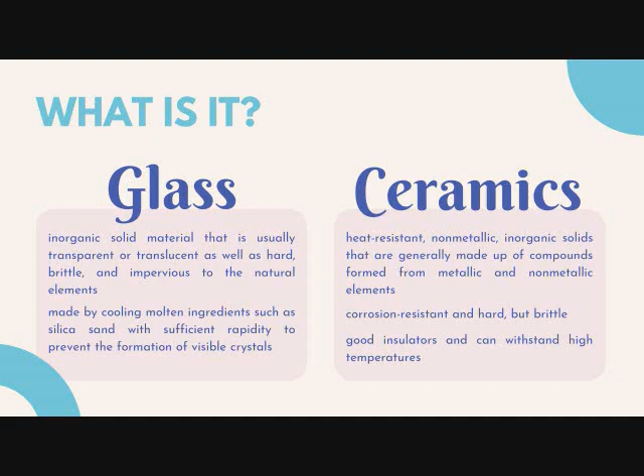As I've mentioned a while ago, glass and ceramics, though in some ways similar, are still a bit different. Glass, for example, contains impurities that prevent crystallization. This is because glass is an inorganic product of fusion that is cooled to a rigid condition without crystallization, as opposed to ceramics, which are inorganic, non-metallic, crystalline solids. Moreover, glasses are amorphous solids, which means that they have no real or apparent crystalline form.

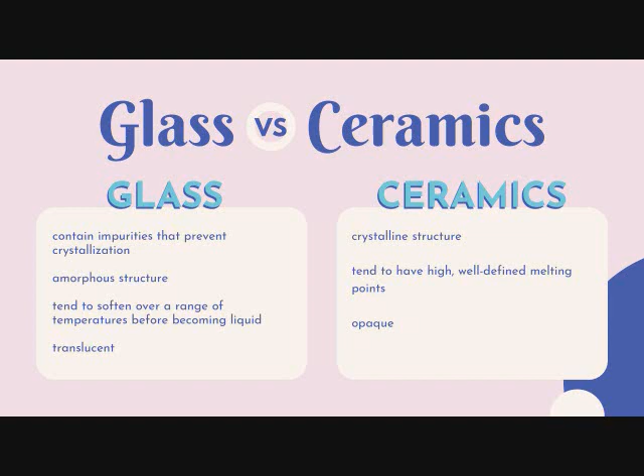Another characteristic of glass is that it tends to soften over a range of temperatures before becoming liquid, while ceramics have high and well-defined melting points. Another difference is that glasses tend to be translucent, while most ceramics are opaque to visible light.

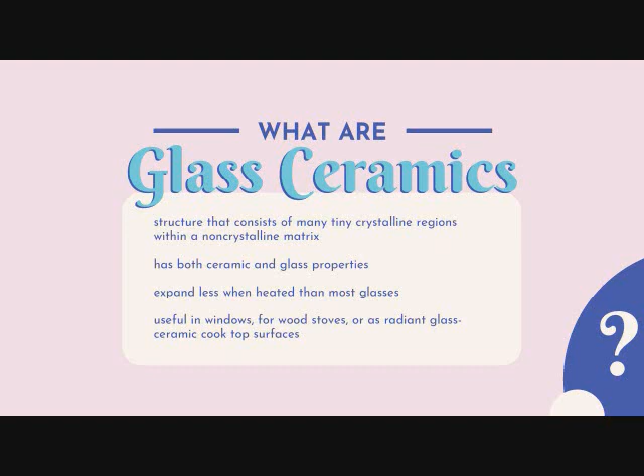With the two having quite similar properties, some changes could create a new product, an example of which is glass ceramics. Glass ceramics is a product formed by the controlled crystallization of a glass-forming melt. It is a structure that consists of many tiny crystalline regions within a non-crystalline matrix. This structure gives some properties of ceramics and some of glasses. Glass ceramics also expand less when heated than most glasses, making them useful in windows for wood stoves, or even as radiant glass ceramic cooktop surfaces.

Now that we were able to define glass and ceramics, and we were also able to identify the existence of a product that is basically a combination of the properties of the two, we can now focus on ceramics. There are two main categories of ceramics: traditional and advanced. Traditional ceramics include objects made of clay and cements that have been hardened by heating at high temperatures. Traditional ceramics are used in dishes, flower pots, wall tiles, etc.

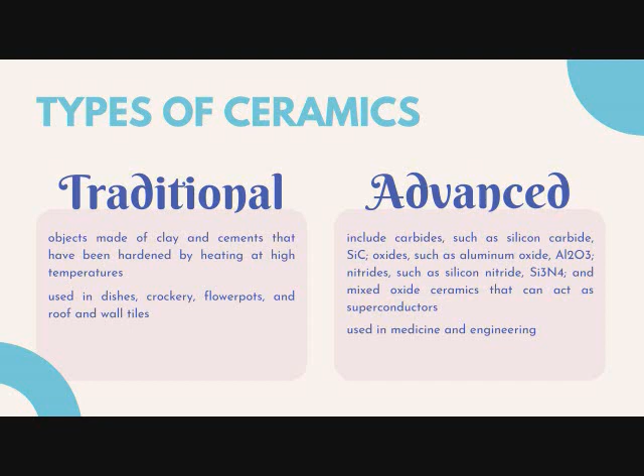The other category is advanced ceramics. Advanced ceramics include carbides such as silicon carbide, oxides such as aluminum oxide, nitrides such as silicon nitride, and many other materials, including the mixed oxide ceramics that can act as superconductors. Advanced ceramics require modern processing techniques, and the development of these techniques has led to different advances in medicine and engineering. So let's talk about the different types of glass and ceramics.

So for glass, we have fused silica glass. Fused silica glass is when silicon tetrachloride undergoes pyrolysis, which is also known as decomposition due to high temperature. Other characteristics are that it has low expansion and a high softening point, it has high thermal resistance, and it is transparent to ultraviolet radiation. Because of these characteristics, it has several applications such as optics and lenses for the ultraviolet spectrum, starting material for optical fiber, windows for spacecraft, halogen lamps, and semiconductors.

Next, we have soda lime glass. This is the most common type of glass, since 95% of all glass manufactured is soda lime. The typical composition is 70 to 74% silicon dioxide, 8 to 13% lime, and 13 to 18% sodium oxide. It melts at relatively low temperatures, and it is also chemically resistant. It is easily resoftened. As for its applications, it is used in bulbs, window panes, bottles, Tupperware, and containers.

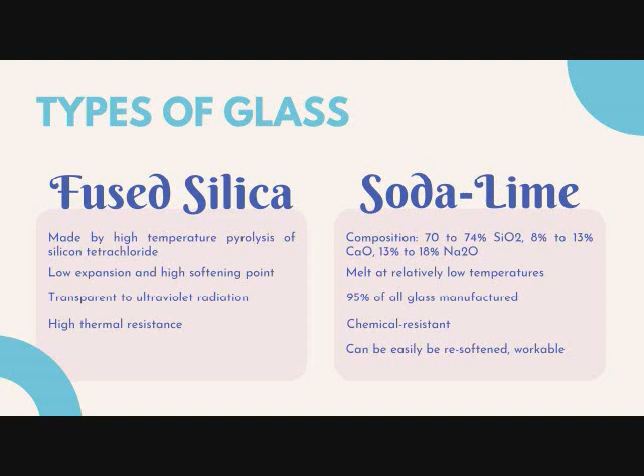Next we have lead glass. For lead glass, lead oxide is used instead of calcium oxide. It has a high index of refraction and dispersion, and it is also electrically resistant. It's often used in electric light bulbs and protection against nuclear radiation.

Next we have borosilicate glass. Typically it contains 10 to 20% boron trioxide, 80 to 87% silica, and less than 10% sodium oxide. It is known for its low expansion coefficient, resistance to shock, and chemical stability. It is also known as Pyrex, and it's mostly used in laboratories. It is also used in high tension insulators, pipelines, and telescope lenses.

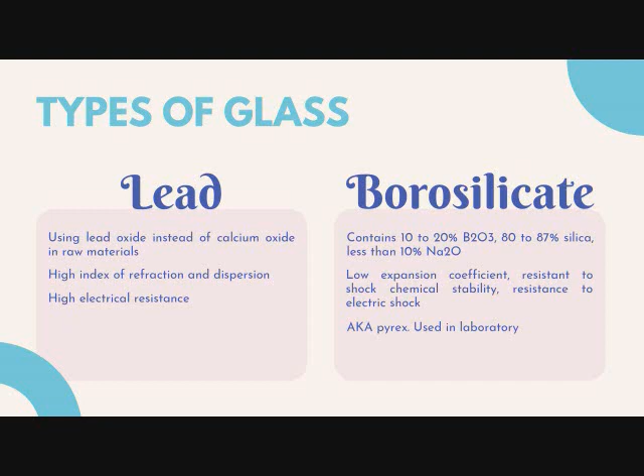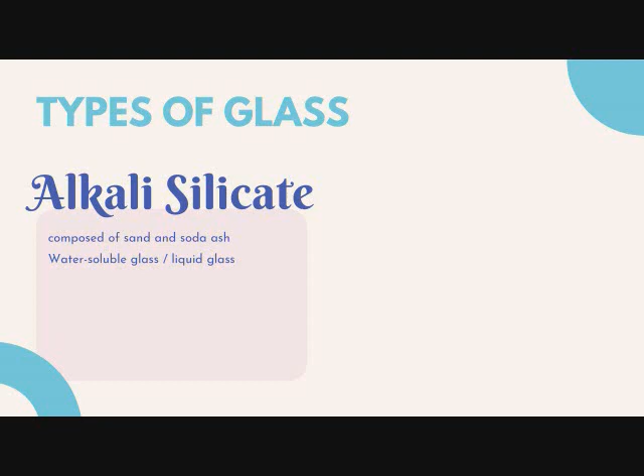Lastly, we have alkali silicates. It has two components only, sand and soda ash. It is also known as water-soluble glass or liquid glass. As for its applications, it is used in adhesives for papers, detergent and soap building, fireproofing, textiles, and silica gel production.

Okay, so now let's discuss the history of glass and ceramics. So first, around 28,000 BCE, or before the Common Era, ceramic figurines are used for ceremonial purposes. 7,000 BCE, sharp tools made from natural glass appear. 5,000 BCE, Phoenician merchants possibly make the first glass.

In 3000 BCE, glazed pottery is produced in Mesopotamia. In 1500 BCE, Egyptians start building factories for production of glassware. In the 1400s, high-temperature furnaces are developed in Europe for metallurgical use. In 1843, Henry Bessemer introduced an early form of float glass. In 1959, float glass was invented in the United Kingdom by Sir Alastair Pilkington, and in the 1980s, ceramic high-temperature superconductors are developed.

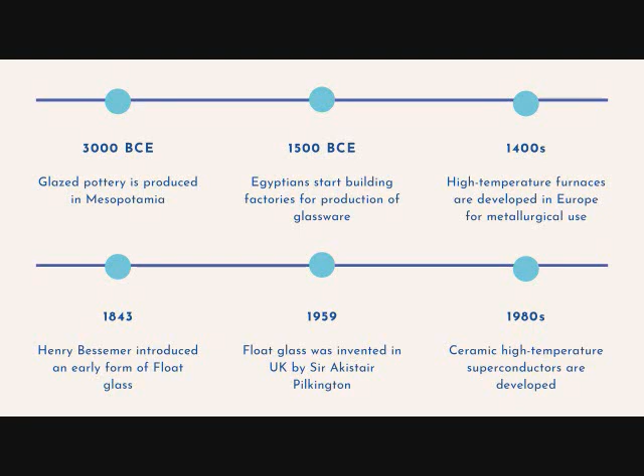The increasing use of LCDs in consumer durables, smart handheld devices, and automotive applications is one of the most significant factors projected to drive the growth of the glass substrate market. In addition, the growth of the semiconductor and electronics industries is further projected to drive the increased demand for glass substrates.

Based on type, the glass substrate market has been segmented into borosilicate-based glass substrates, silicon-based glass substrates, ceramic-based glass substrates, fused silica or quartz-based glass substrates, and others. Borosilicate-based glass substrates type is the most widely used type of glass substrates owing to their superior properties such as low coefficient of thermal expansion, high chemical resistivity, and high surface strength.

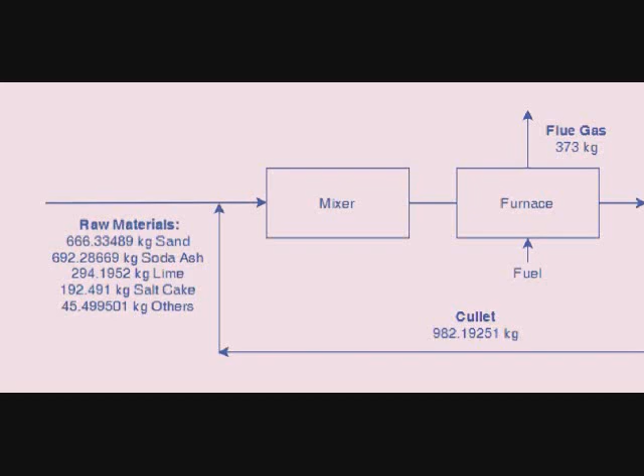Now let's take a look at our block flow diagram for a typical glass making process. So first, the raw materials enter the mixer and are joined together. After this, they are directly transferred into the furnace. During this part, as much as possible, we want to lessen the contaminants, such as dust particles and air holes. So once it is in the furnace, fuel is used and it is heated at around 1600 degrees Celsius. After that, it is transferred onto a tin bath.

So a tin bath is when the molten glass is allowed to flow on top of molten tin. These two substances do not mix, and since molten glass is less dense than tin, it floats. And this allows it to be perfectly flat. So H2 and N2 is entered in the tin bath to prevent the tin from oxidizing.

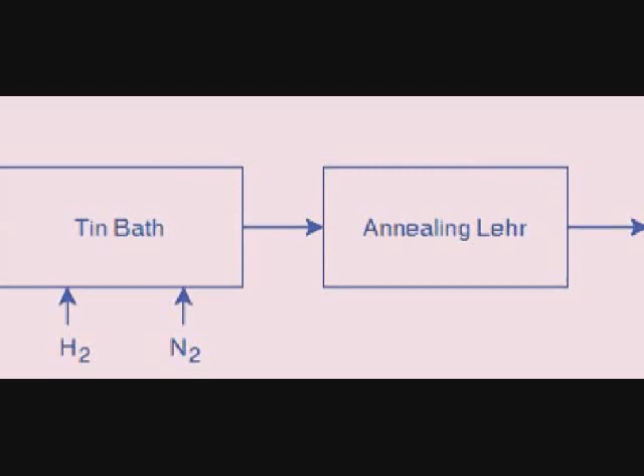So the flat glass is now transferred onto an annealing lehr. So annealing is basically just controlled cooling in order to reduce residual stress in the glass product. So after that, it usually undergoes cutting. So during cutting, the excess glass or waste glass is transferred onto a grinder or miller, which turns it into cullet. Cullet is an important raw material for glass, so it is basically a recycled stream that will mix with the fresh feed that enters the mixer.

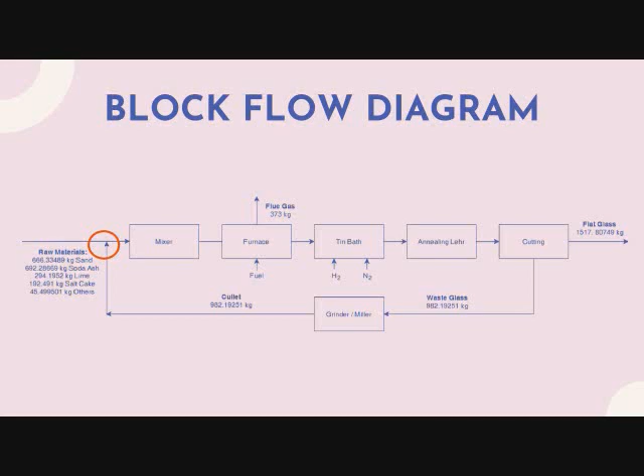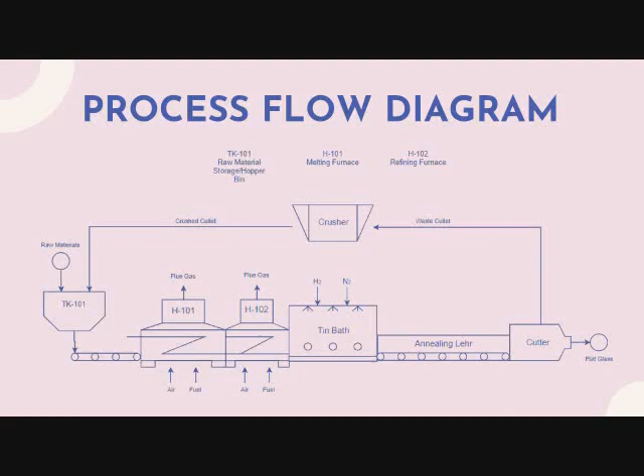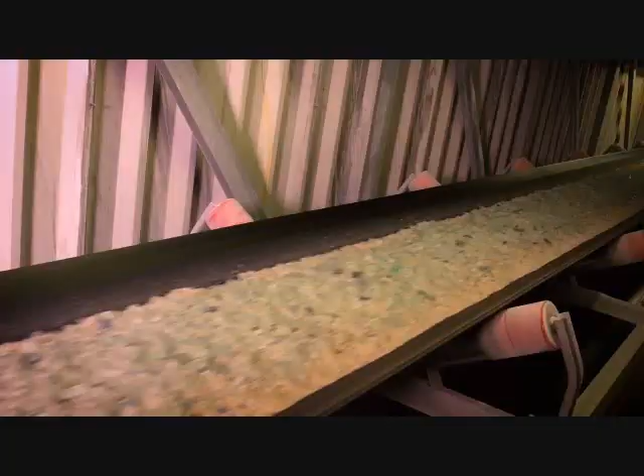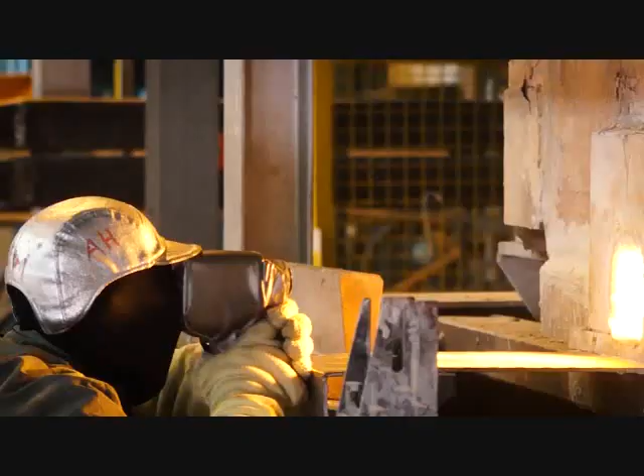We produce around 9 miles of glass at our Yorkshire factory every day. It all starts as sand, soda ash, limestone, dolomite, calumite, salt cake and recycled glass that's melted in a furnace at 1550 degrees Celsius. From the furnace, molten glass flows onto the surface of a bath of molten tin.

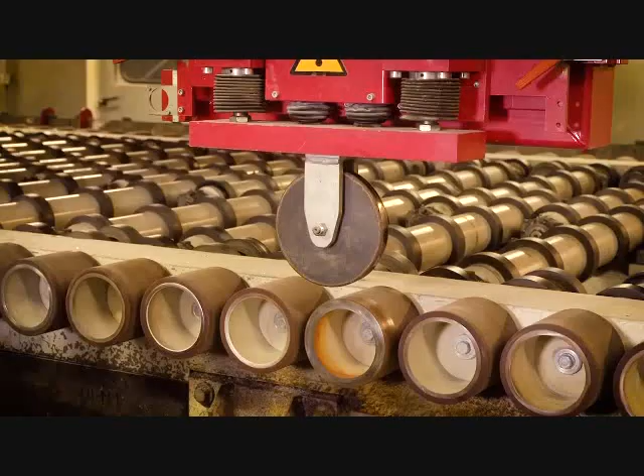Next, the glass enters an annealing lehr where it's slowly cooled to release any internal stresses. A state-of-the-art laser detection system then checks every square centimetre for the slightest imperfections before the glass is cut. The glass is then ready to be sent to customers or to be coated or laminated.

Here are the unit processes involved in glass production. First is furnace melting. In this unit process, the raw materials are fed into the melting furnace and are exposed to around 1500 degrees Celsius of heat for about 50 hours. The liquid molten glass is produced given the following reactions. The overall reaction on simultaneous fusion may be represented by the fifth chemical reaction shown in this slide.

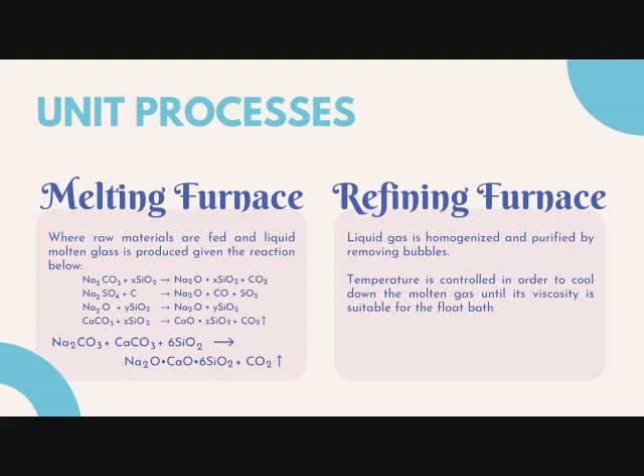The second unit process is furnace refining. In the refinement furnace, the liquid glass is homogenized and purified by removing bubbles. Additionally, temperature is controlled in order to cool down the molten glass until its viscosity is suitable for the float bath. So for the unit operations, we first have hopper. So the hopper is where the raw materials, namely sand, soda ash, limestone, and alumina, are placed into a hopper in proportions. The hopper is directly fed into the furnace in order to avoid contamination with dust particles.

Next, the float bath. The float bath is where the liquid glass produced from the furnace is transferred onto. The temperature of this molten glass is about 1100 degrees Celsius, and it is allowed to float on top of a perfectly flat layer of melted tin. The molten glass is less dense than tin, which allows it to float. Tin and molten glass do not mix, and tin also has a higher boiling point than that of molten glass. The molten glass leaves the tin bath at around 600 degrees Celsius. And in order to prevent the tin from oxidizing, a controlled atmosphere of hydrogen and nitrogen is present inside the bath.

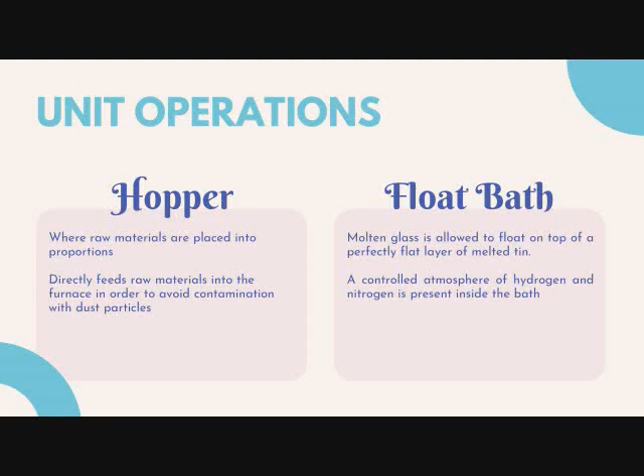The next unit operation is annealing. So annealing is the process of controlled cooling in order to prevent residual stress in the glass or prevent distortion. Rapid cooling of the melt is necessary to obtain a glass product rather than it be crystallized. This rapid cooling will generate internal stresses or constraints within the glass, which will be detrimental for the mechanical properties.

These constraints can be relaxed by careful thermal treatment called annealing by lowering the temperature of the rigid glass ribbon that came out from the float bath from 600 degrees Celsius to 250 degrees Celsius by passing through a cooling tunnel called lehr. Good annealing is essential to produce good commercial glasses, as it assures durability. Non-annealed or poorly annealed glasses will be subject to low resistance to cracks or failures under small thermal or mechanical shocks.

All along the cooling process, the viscosity of the glass increases from a low viscosity melt to a rigid material with a higher viscosity. A certain degree of freedom is necessary for the glass to relax the constraints caused by the rapid cooling, causing rearrangements in the glass structure. Good annealing can only be obtained in a relatively narrow range of temperatures. For a good annealing of the constraints, the viscosity of the glass should not be too high so that constraints may no longer be released, and not too low so that the glass will not retain its initial shape.

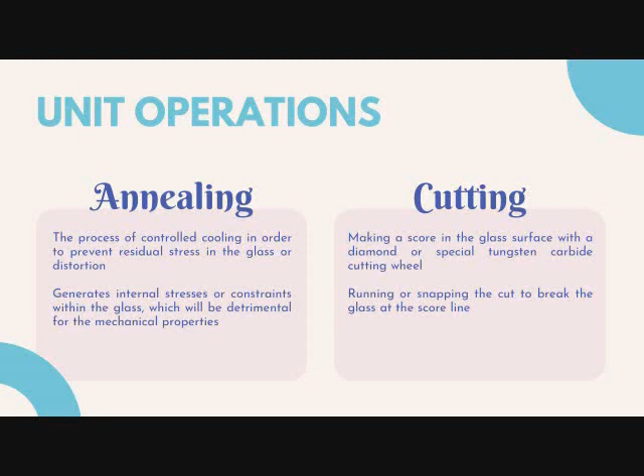The next unit operation is cutting. The glass cutting process involves making a score in the glass surface with a diamond or special tungsten carbide cutting wheel, and then running or snapping the cut to break the glass at the score line. Diamond wheels are used to trim and cut the cooled glass ribbon into sheets before being stacked into packs or cases ready for dispatch. The final unit operation of the Pilkington process is the grinding or milling.

Recycled glass cullet is a low melting substance which requires less energy to melt than the virgin raw materials. In the recycling process, recycled glass cullet is fed for grinding into a ball mill in which it is ground to a very fine glass powder ranging from 100 to 500 microns.

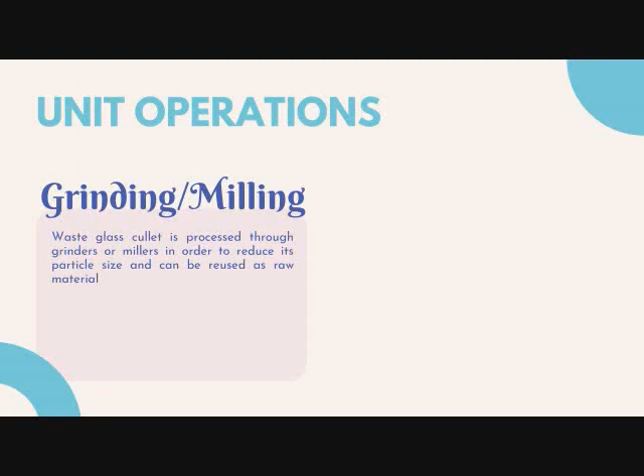Now let's talk about the factors affecting glass. First, we have surface defects. Of course, the strength of the glass is directly influenced by surface defects. During the blowing process in some glass, direct contact with cold mold leads to formation of high surface defects due to abrupt solidification of a thin surface layer. Next, we have glass compositions. This usually depends on the presence of glass-forming oxides such as beryllium oxide, calcium oxide, magnesium oxide, etc.

Next, we have technological factors. Under this, we have the speed of formation, geometry of products, performance of the glass furnace, temperature condition during forming, and the annealing conditions. 40% of construction glass is actually lost during shipping, storage, and installation. This is due not only to the mechanical damage to the surface, but also the corrosion processes that may occur, because glass often corrodes when exposed to moisture. And lastly, float glass surface sometimes has rough contact with the conveyor belt, which also damages the glass product.

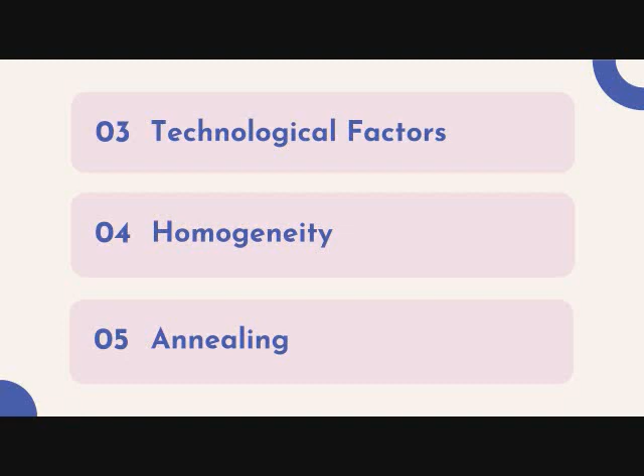Next, we have homogeneity. There have been previous attempts in making heterogeneous window glasses, which are 30% quartz. However, the components did not react with the other raw materials and the glass did not form. Instead, the other components just melted and the crystals formed. In addition to that, the product glass was also not strong. We also have annealing, which removes internal stress and influence of the environment. Contamination of dust particles creates microscopic craters that retain moisture, and also humidity leads to corrosion, as mentioned a while ago.

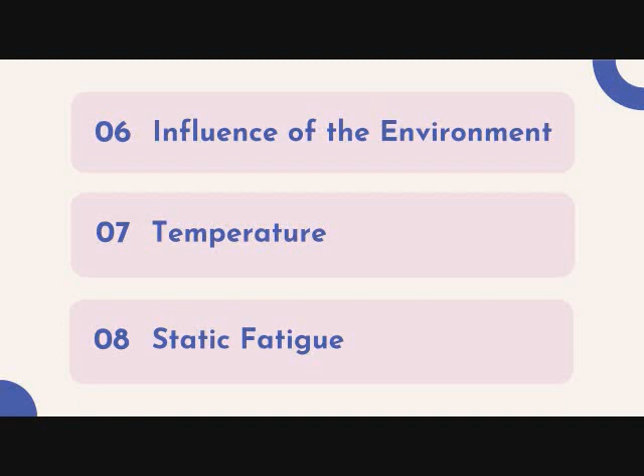We also have temperature. Basically, it is important to make sure that the temperature of the furnace is in the correct setting of 1600 degrees Celsius in order to make sure that the raw materials are successfully converted into glass. Next, we have the static fatigue of the glass. When glass is not properly annealed, as mentioned a while ago, the static fatigue tends to show in the glass product. Lastly, we have the influence of the size of the glass, which simply means that the thicker the glass, the more durable it is.

Now let's look at the conditions that exist within the Pilkington process. The raw materials first enter the furnace at 1500 degrees Celsius. Then it turns into molten glass and exits the furnace at 1100 degrees Celsius. The molten glass then enters the float bath at 1100 degrees Celsius, turns into a rigid glass ribbon, and exits at 600 degrees Celsius. This rigid glass ribbon then enters the annealing lehr at 600 degrees Celsius, and it is cooled until it is 250 degrees Celsius. Then it is finally ready for cutting.

Pioneer Float Glass Manufacturing Incorporated, or PFGMI, is the leading flat glass manufacturer in the Philippines. It was established in 1958 under the former name of Republic Glass Corporation and eventually became a wholly owned subsidiary of AGC in 2001, adopting the company name AGC Flat Glass Philippines Incorporated. However, in 2017, TQMP Glass Manufacturing Corporation acquired 100% of the AGPH shares, thus becoming the torchbearer for the flat glass industry in the Philippines, hence the new name Pioneer.